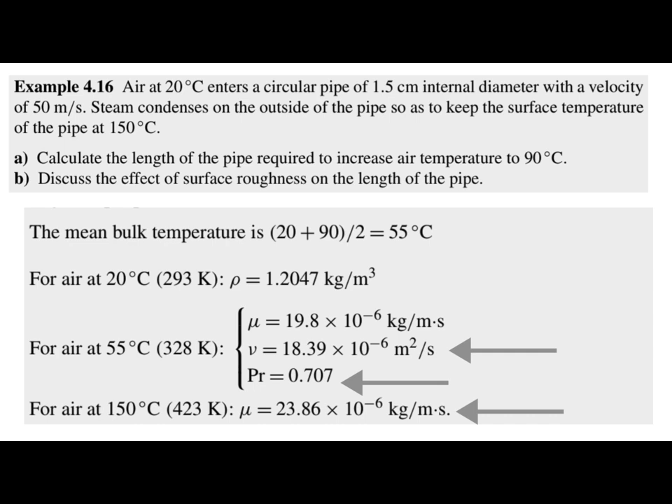This is the different part of the question. Now we are given some data: the mean bulk temperature is 55 degrees Celsius, and air properties like density, viscosity, kinematic viscosity, Prandtl number, and other things are given. Let's start the solution.

This is basically the schematic diagram of the question. The air enters at a temperature of 20 degrees Celsius with a velocity of 50 meters per second.

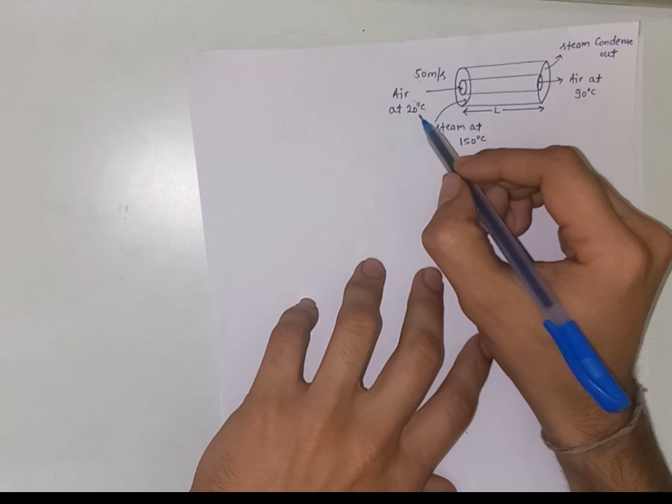Okay, and now we have to find the length of this heat exchanger L, and the air should leave at the end at 90 degrees Celsius. The steam providing the convective heat to raise the air temperature from 20 to 90 degrees Celsius is at 150 degrees Celsius. So steam is entering and getting condensed from that side.

In this question we need to find the length of this heat exchanger so the temperature of air can be increased from 20 to 90 degrees Celsius, from one side to the other. The basic approach is to go by energy balance and mass balance.

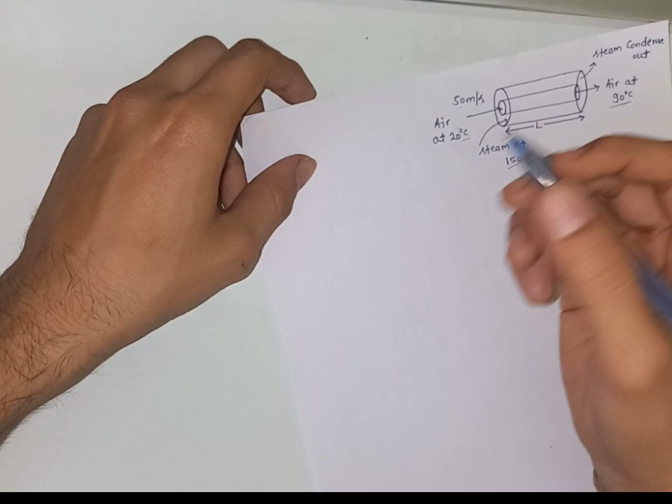Across this heat exchanger, we can write the mass balance: the total mass going inside the system is equal to the total mass going outside the system. Because this is a continuous process, there is no addition of mass, only addition of heat or energy. The steam loses its energy and gives it to the air, condensing out from one side, while the air temperature increases on the other side.

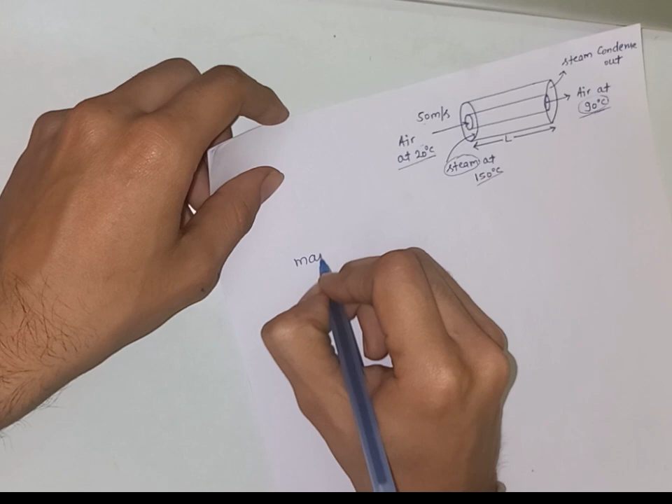So first we are going to write the mass balance. Total mass going inside the system is equal to total mass leaving the system. We are basically talking about the air only, so this is the mass balance on the air - total mass inside the system equals mass going out.

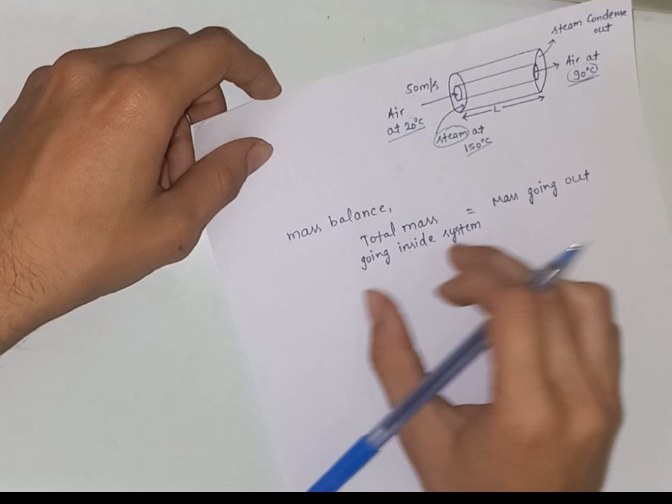These both are equal, and there is no addition or subtraction of mass. Whatever mass comes from one side leaves from the other side, so the magnitude and direction are both the same. This is the mass flow rate, which we denote by m dot, representing kg per second or mole per second.

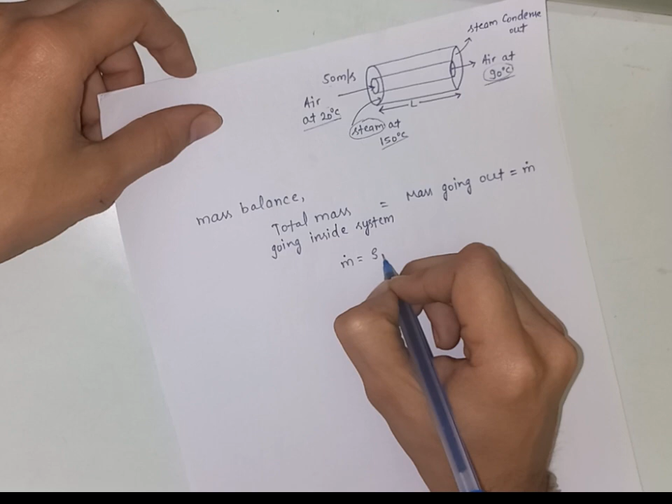This mass flow rate we can also write in terms of density and volumetric flow rate, that is density multiplied by volumetric flow rate q, where density is kg per meter cube and q is meter cube per second. If we don't know the volumetric flow rate, we note this is a circular cross section with diameter or radius, so we can find the area, and we know the velocity. We can write mass flow rate as density multiplied by velocity into cross sectional area.

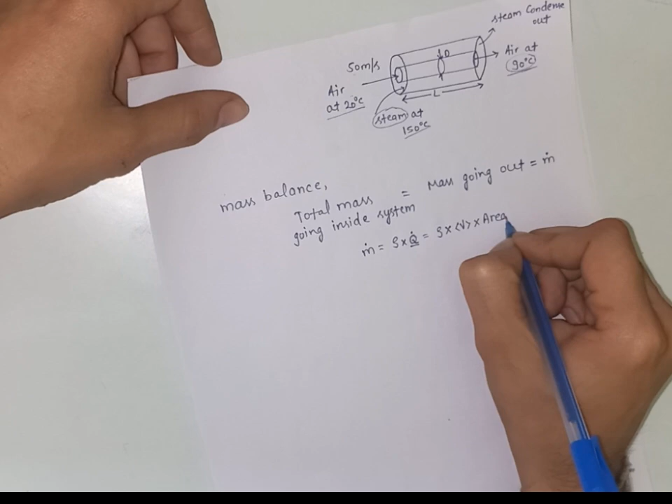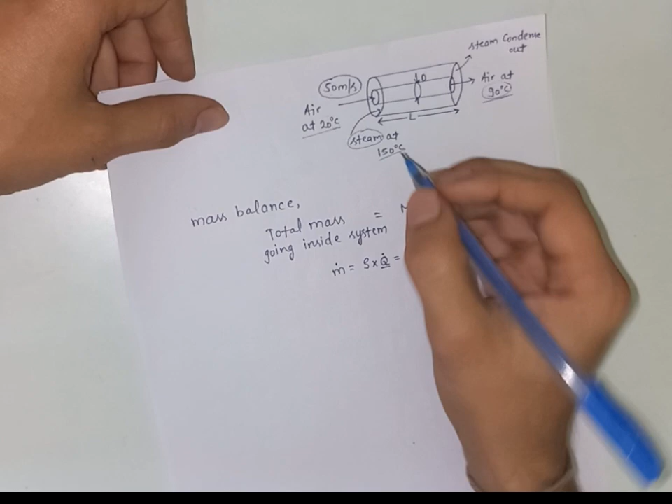This is basically the characteristic velocity - in the case of fluid flowing through a cylinder, this is the velocity through the axis of the cylinder. Here we are given 50 meters per second in the question itself. So we write it as density multiplied by characteristic velocity and area. The area in terms of diameter, since this is a cylindrical case with a circular cross section - area of a circle is pi r squared, but in terms of diameter it is pi d squared by 4.

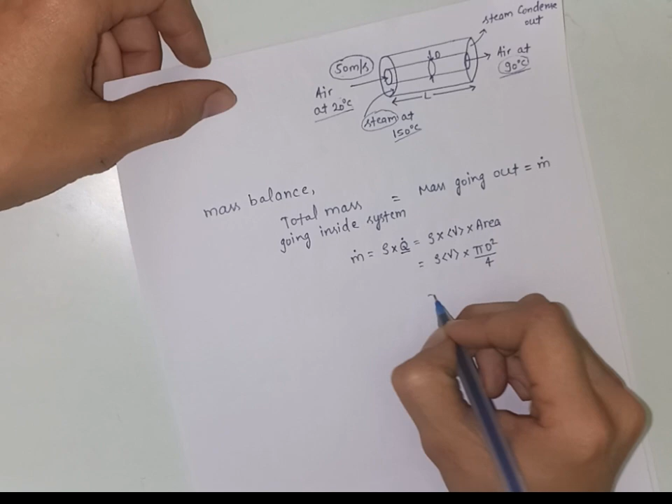So this is the definition of mass balance. Now we are given the data: density at 20 degrees Celsius, velocity of 50 meters per second, and diameter is also given. So now we will find the value of all these constants to find the mass flow rate.

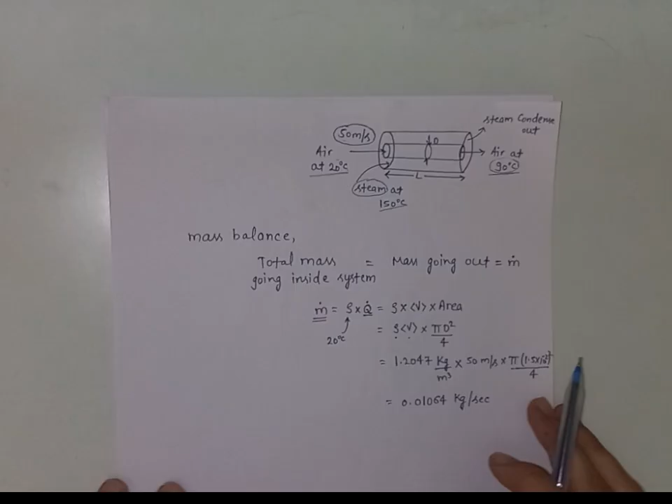So now we have substituted all the values of density, characteristic velocity, and diameter of the pipe, and found the mass flow rate of air inside the system, that is 0.01064 kg per second. This is the mass flow rate going inside and out of the cylinder, which we will use in further calculations. This concludes the mass balance of the air.

Now we will do the energy balance of the air, to find some unknown parameters and correlations to determine the length of that heat exchanger. So now we'll go for the energy balance.

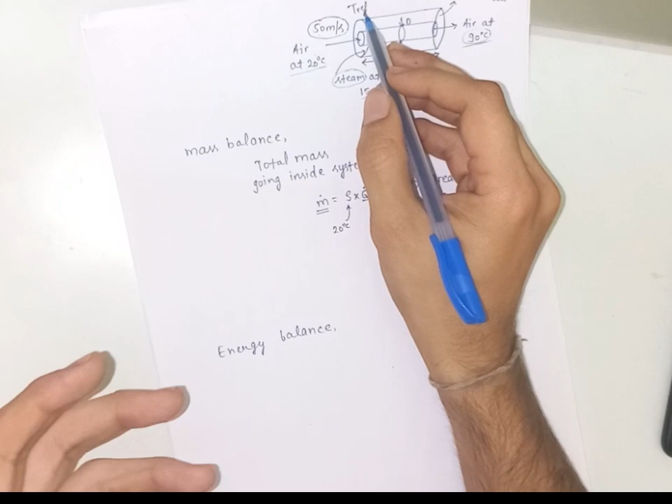So first of all, energy which is going inside the system at the entrance, because air is at 20 degrees Celsius. So we will take a reference temperature for our calculation purpose, to represent the energy contained by the air when it is entering the cylinder. Initially we're going to write the heat capacity or heat at a reference temperature, that is T reference.

So energy in by air, that is Q in, which is equal to mass flow rate in kg per second, into heat capacity of the air, and the temperature of the air, which is 20 degrees Celsius already given, minus this T reference temperature, because we are representing this energy with respect to some reference temperature. So this is a kind of reference temperature for the calculation purpose.

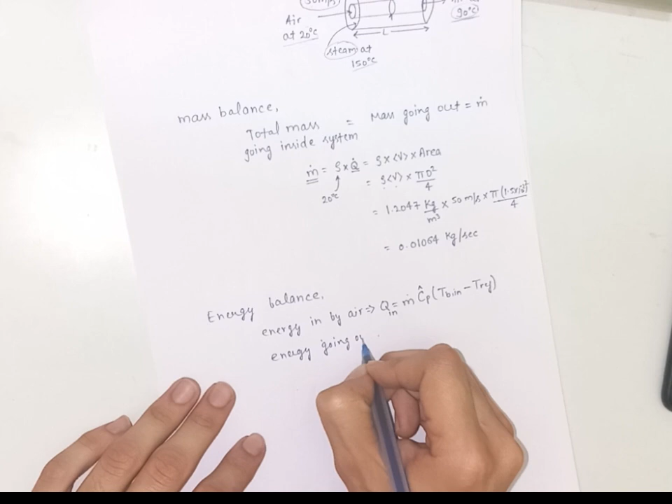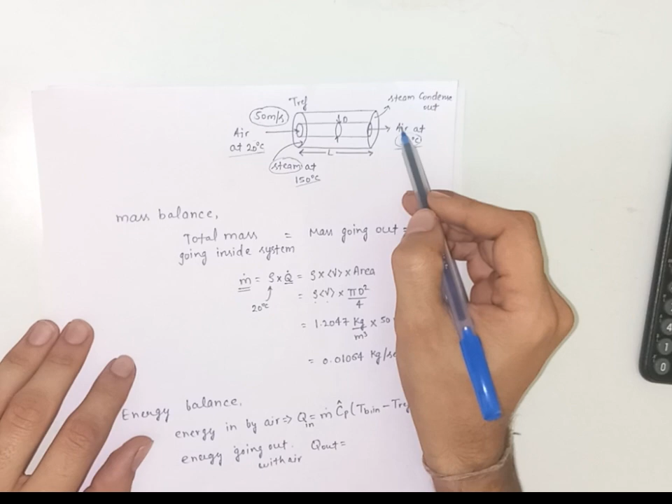Now, energy which is going out, we are going to represent by Q out. The thing we need to keep in mind is that when the air is entering the cylinder, the heat it contains is mCp delta T. But now, because when it is leaving the cylinder, the steam loses its energy and gives it to the air, and the steam condenses, and the overall energy of the air will rise.

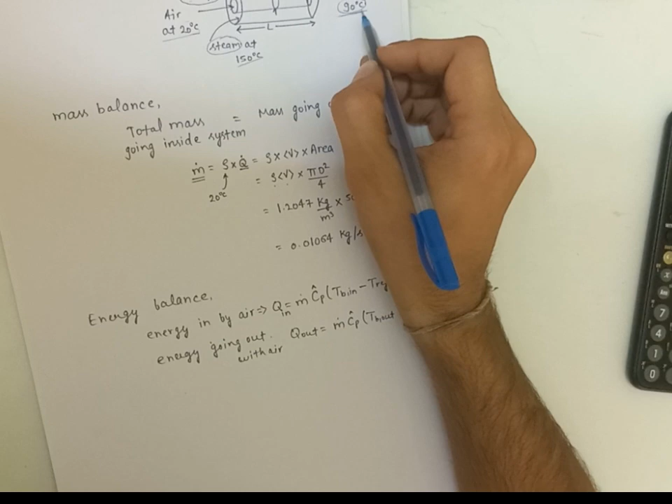So how much energy will rise? We're going to write mass flow rate Cp, that is heat capacity, into the temperature out, that is 90 degrees Celsius, minus again T reference, and now the convective heat transfer by the steam to the air, which will be H into contact area, and again the delta T, that is the change in temperature between the steam and the air. So we will have a convective heat transfer between the steam and the air.

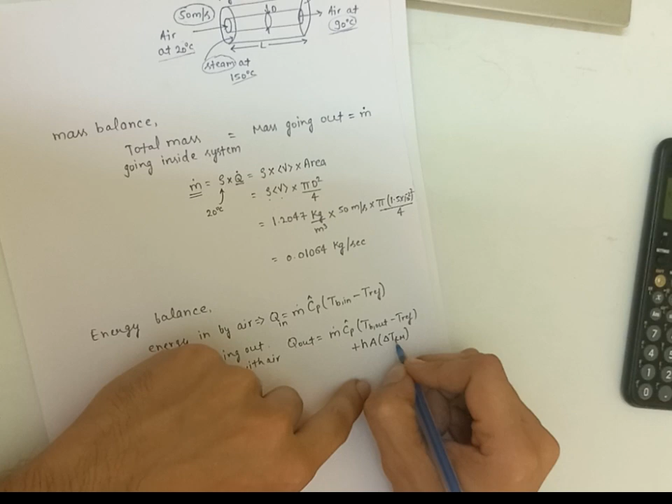So this is logarithmic mean of the temperature. We are having the heat transfer coefficient as average h, and we take the average value of the heat transfer coefficient, and the contact area, in this case a cylinder, so the contact area between the steam and the air is the curved surface area. This curved surface area for a cylinder is 2 pi r h, so the area will be 2 pi r h, and h means length, so L.

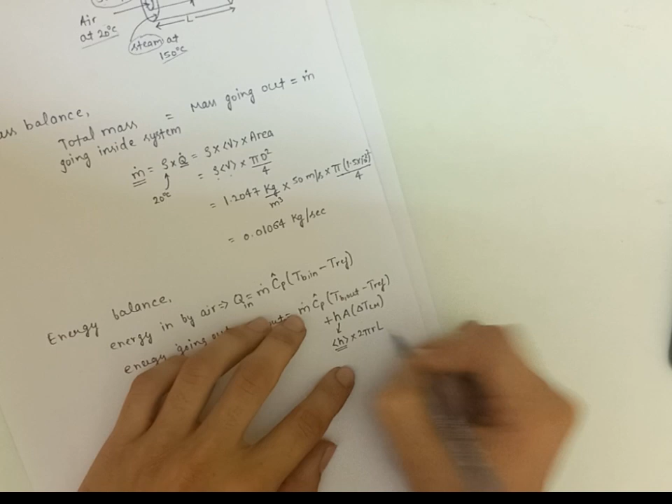And now this delta T Lm we are having, so this can be written in the expanded form, something like that. And now we can also write 2r as d, so this formula can be written as h into pi dl into delta Tlm.

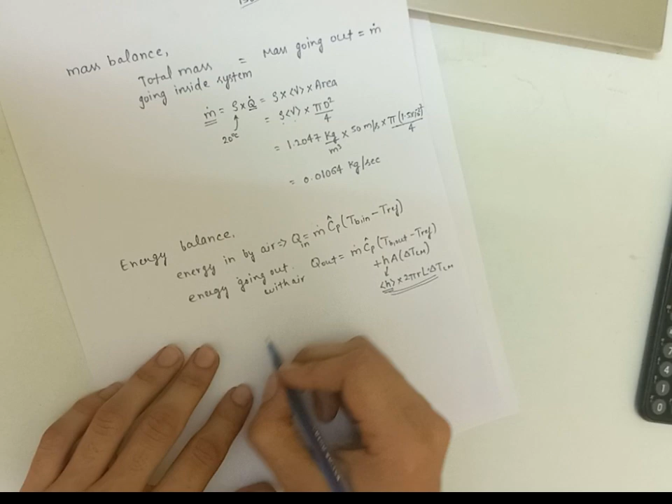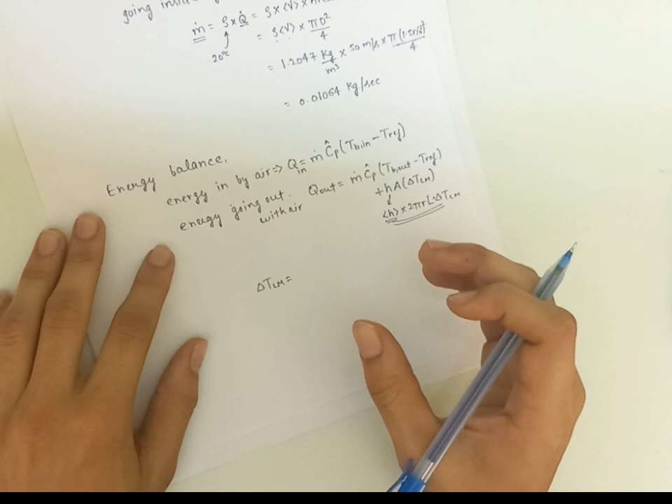Now this delta Tlm is basically the logarithmic mean of change in temperature, because as the steam goes from this side to the other side, there is a mean temperature difference between the air and the steam, since the steam temperature is reducing and the air temperature is rising. So we will not have a definite value between the steam temperature and air temperature, this delta T should not be constant, otherwise it will have some logarithmic mean value, average value. So in cylindrical cases we take the logarithmic mean.

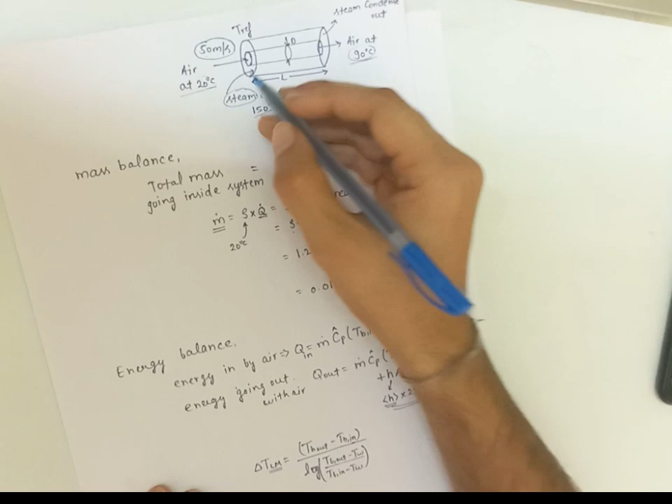So we will write this as TB out minus TB in, already provided in the problem, that is 90 degrees Celsius and 20 degrees Celsius, divided by ln of TB out minus TW, and this TB in minus TW. This TW is another mean temperature between both of these, so we don't need to take care about that, the calculation takes care of it by itself.

So now we will balance both of these, because for the energy balance, energy coming in is equal to energy going out. So for air we are going to balance out both of these terms.

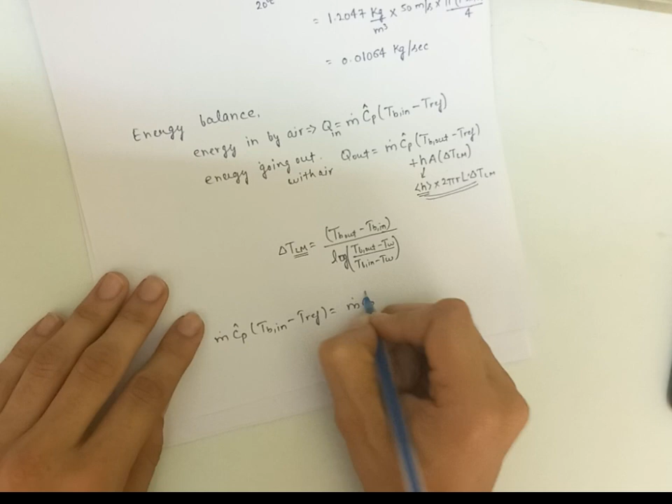So mCp TB in minus reference temperature is equal to mCp TB out plus this convection term, average h into pi d in terms of diameter, and then delta TLM.

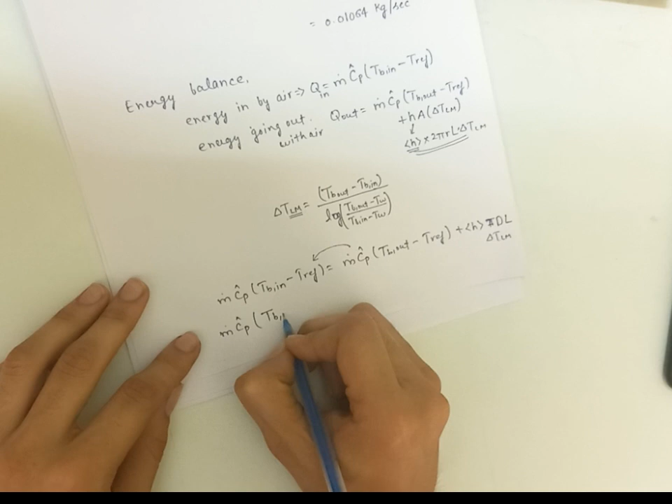Now this term we're going to send it to that side, to reduce the number of terms. So when it comes to this side, we will get a term as mCp, and this will be TB in minus T reference temperature minus TB out minus T reference temperature is equal to average h pi d delta T logarithm.

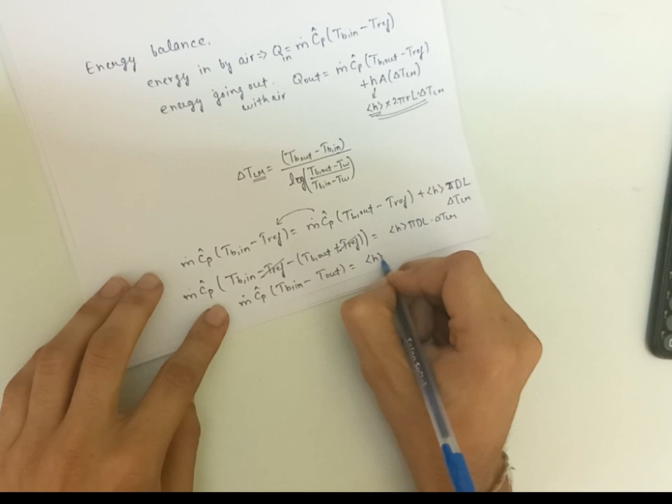Now when we open this bracket, this will be plus, and this both reference temperature will be cancelled out, and what we are left with is mCp delta T plus TB in minus out is equal to average h pi d delta TLM.

So now at the end of energy balance, we get this relation: mass flow rate, heat capacity, and TB out, the output temperature of the air. In this case, it is 90 degrees Celsius, and the input temperature is 20 degrees Celsius, and h, the heat transfer coefficient, and that area, and the logarithmic mean temperature difference of the heat exchanger.

Now we're going to substitute the values here, and we need to proceed with the solution to find out L, that is the length of the heat exchanger.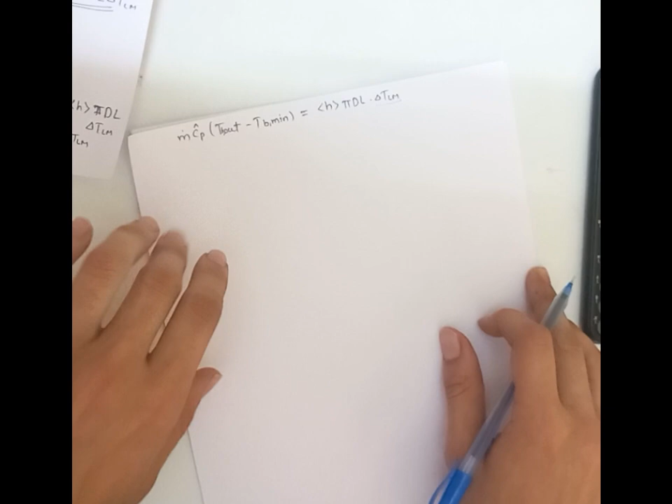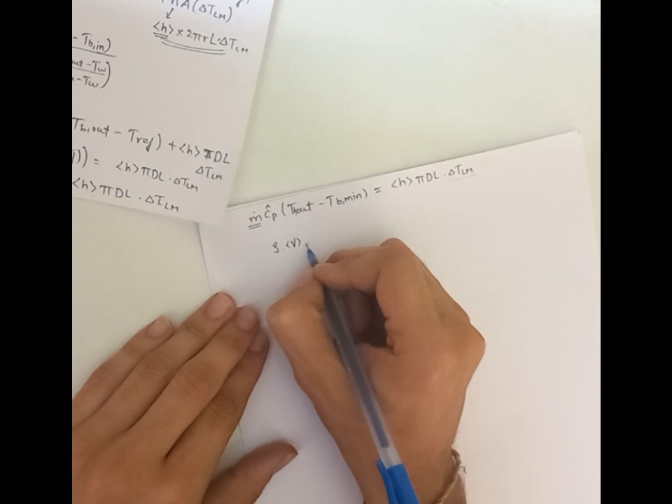Now this M can be replaced by the formula we already have, that is rho and velocity and the area of that cylinder. So M can be written as rho and the characteristic velocity V, and pi d square by 4, and Cp, and we know this is TB out minus TB in.

All the things will remain the same, only we have to substitute mass flow rate M, and this H pi d L and delta TLM. Now we know pi and pi will cancel out, and d square will be cancelled out, so nothing remains here.

Now what we're going to do is take out H, the heat transfer coefficient, and this logarithmic mean to that side, so that we can equate L equal to this whole term, because we need to find out L. So the whole term should be at the right hand side or left hand side, and we need to find out L. So we're going to write it as...

Rho V Cp, this D, 4H, the heat transfer coefficient, and delta TLM, logarithmic mean temperature, and this is TB out minus TB in, is equal to L. So we can write it on that side, that will look better. So L equals rho V Cp D by 4H, and now we're going to expand this term.

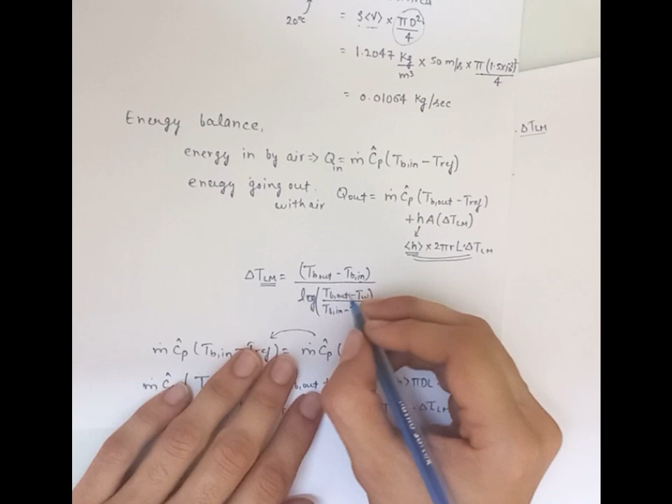We already know this term, and there is one mistake: this is T input and this is T output. The terms will remain the same, and now we're going to put delta TLM, the logarithmic mean temperature difference, here.

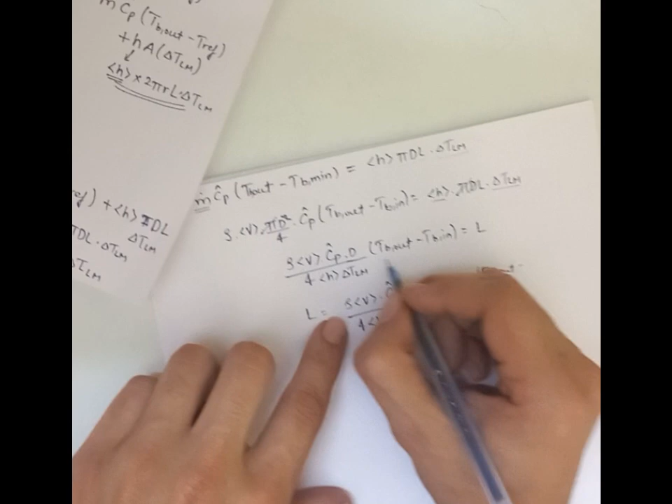So in the bracket we're going to write TB out minus TB in, and the log of TB in minus TW, and TB out minus TW, and here we are having TB out minus TB in. Now we know that in this bracket this term and these terms are the same, so we can cancel them.

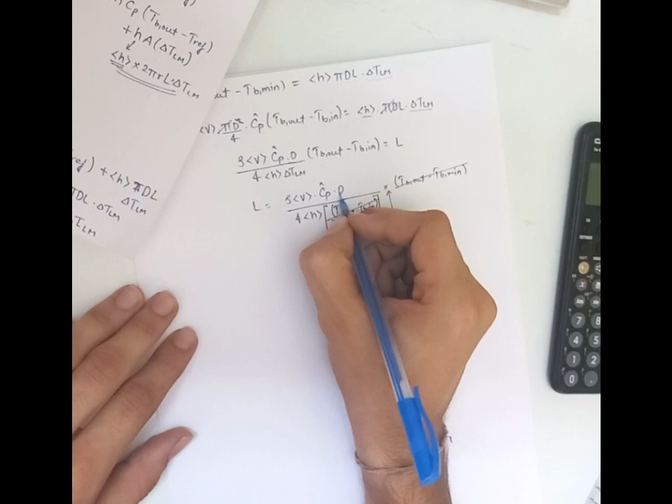And this logarithmic mean will go to the top side, because this is 1 upon log, so the reciprocal of that will go to the upper side. And now we're going to replace D on the left hand side to work out the ratio of L by D, because we know D and we need to find out L.

So we will equate the L by D ratio, which is more commonly used in engineering. So we are going to equate this term: L by D is equal to rho V, and the remaining terms are Cp, 4, heat transfer coefficient, log, and all the terms.

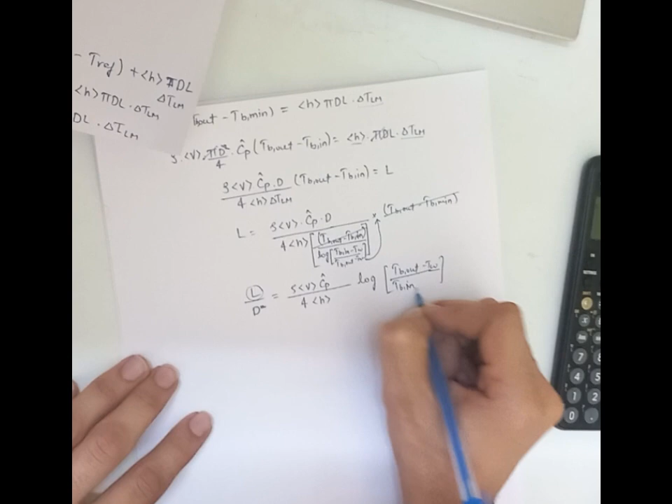Be TB out minus TW, and TB in minus TW. Okay, so now we have finalized the equation. We need to find out L. Main thing is L, we know D, we know most of the terms, and now we need to proceed with the question.

Now we have a relation of L in some parameters like Cp, velocity, density, and the heat transfer coefficient. We're going to proceed further. We can see there is an engineering correlation of heat transfer coefficient like this: heat transfer coefficient, density, characteristic velocity, and heat capacity. This is a reciprocal term, so I have written it in the simple form.

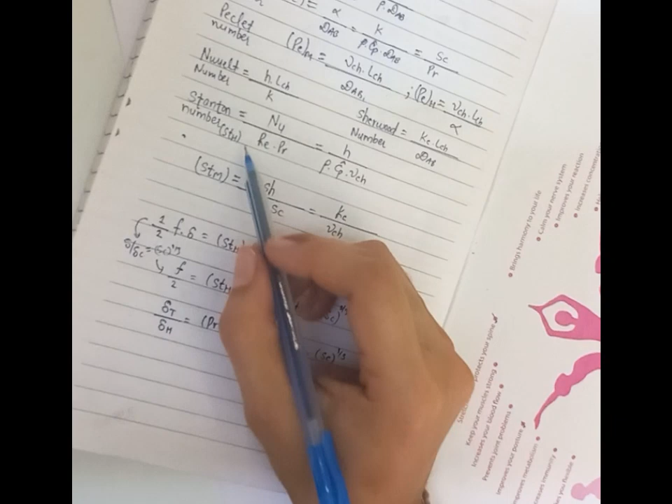So this is equal to the Stanton number of heat transfer, okay so I will show you. This is the Stanton number of heat transfer, that is H upon rho (density), Cp, characteristic velocity. So we have equated these terms here, and this is the relation.

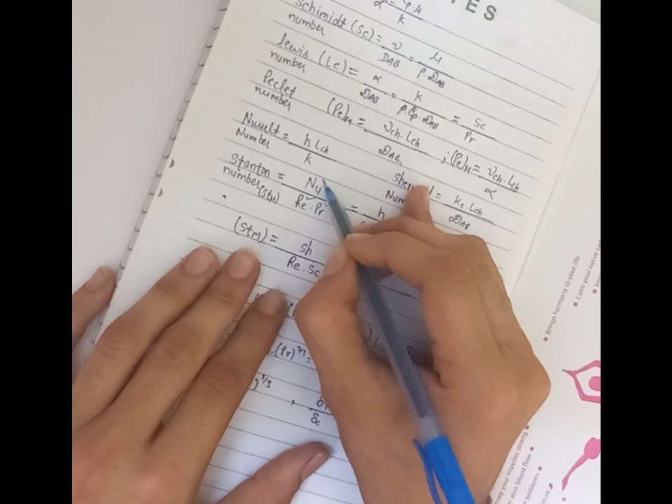And we also know the Stanton number in terms of other important engineering constant numbers, the Reynolds number, Prandtl number, and Nusselt number. We can equate these terms by these numbers, for the simplification. So this term is also equal to the Nusselt number upon Reynolds number and Prandtl number. Because we know this is 1 upon the Stanton number, so we'll be writing here the reciprocal of that term.

So L by D will become, using this relation: L by D becomes 1 by 4, separated out from these terms, and this is Reynolds number into Prandtl number upon Nusselt number, and logarithmic of Tb out minus Tw, Tb in minus Tw.

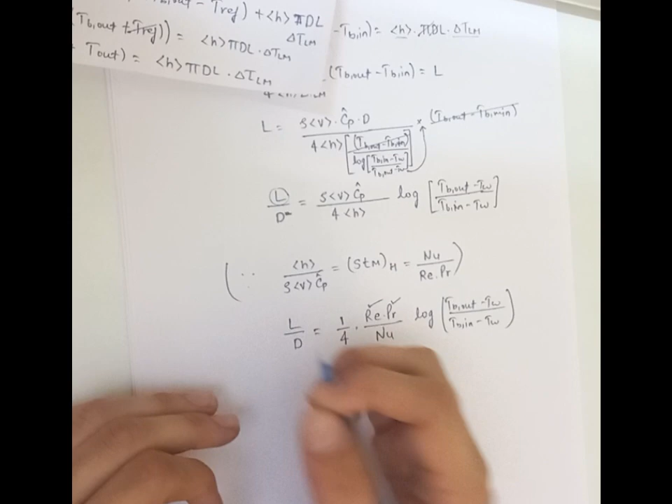Okay, and now we need to find out the Reynolds number. Prandtl number is already given in the question, and the Nusselt number we're going to find out using engineering correlations. We have 3 engineering correlations here.

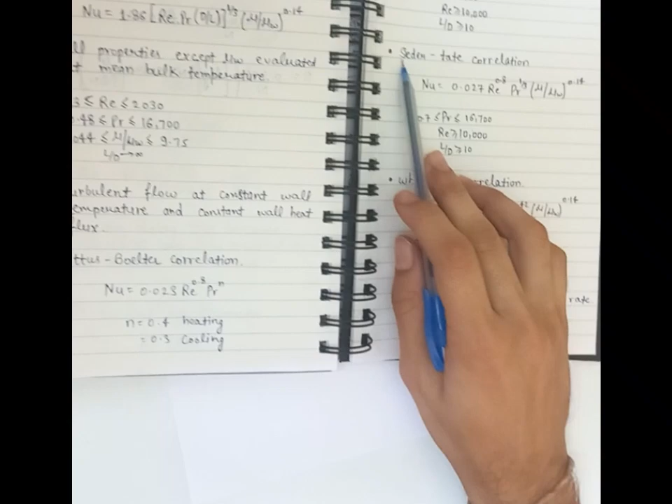For the laminar flow, we will use this engineering correlation for the Nusselt number. For the turbulent flow, we will use the Dittus-Boelter correlation, given by this. Also for turbulent flow, we can use the Sieder-Tate correlation, but the conditions are different here compared to Dittus-Boelter. So according to that, we need to substitute the values and use the formula accordingly. The third one is the Whitaker correlation, with its own conditions. So these are the 3 correlations for turbulent flow and 1 for laminar flow.

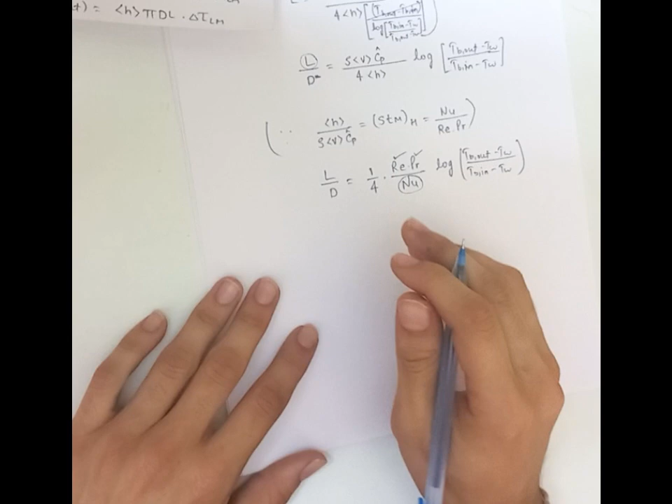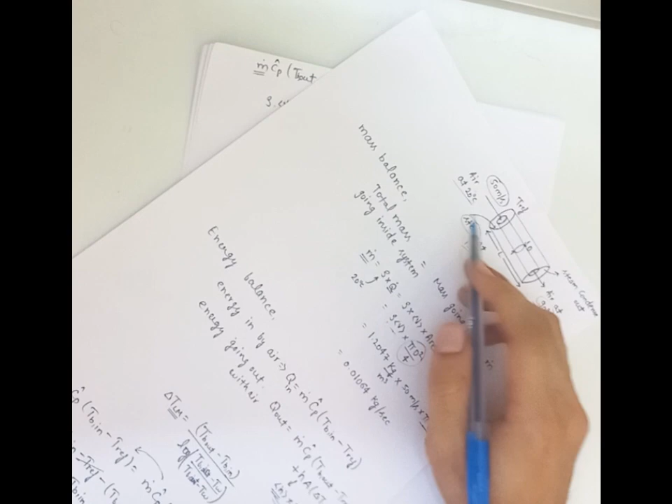So to proceed with these formulas, we need to find the Reynolds number first. Prandtl number is already given in the question. Reynolds number for flow through a pipe uses characteristic length and characteristic velocity, density of the fluid, and viscosity of the fluid. In this case, as I already told, the characteristic length is the diameter of the pipe, and V characteristic is the velocity with which the air is flowing through the cylinder, along with the density and viscosity of the fluid.

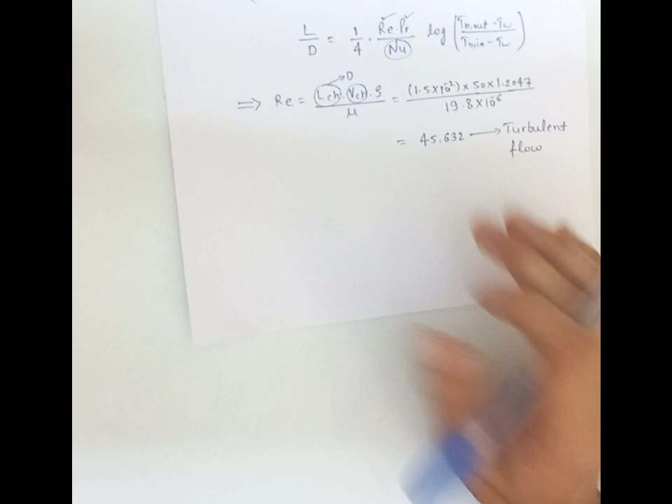Now substituting these values, we will find out the Reynolds number and see whether the flow is turbulent or laminar, and accordingly use the Nusselt number correlation. We substitute all the values like density of the fluid, viscosity of the fluid, diameter as the characteristic length, and the velocity we are having. Now we can see the value is very high, that is 45,000, so this is properly in the turbulent region — the flow is completely turbulent.

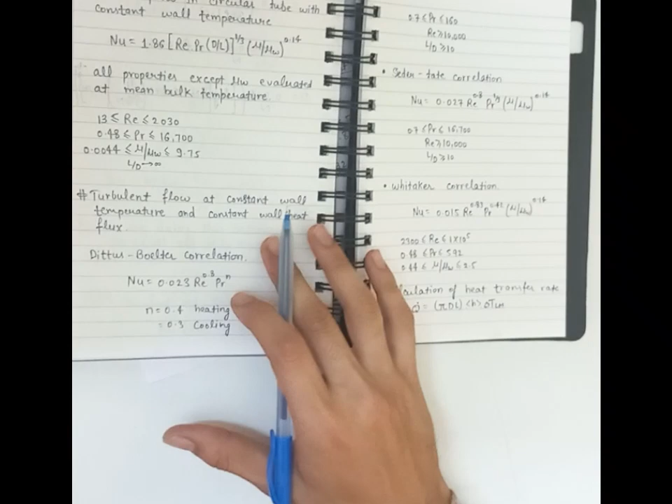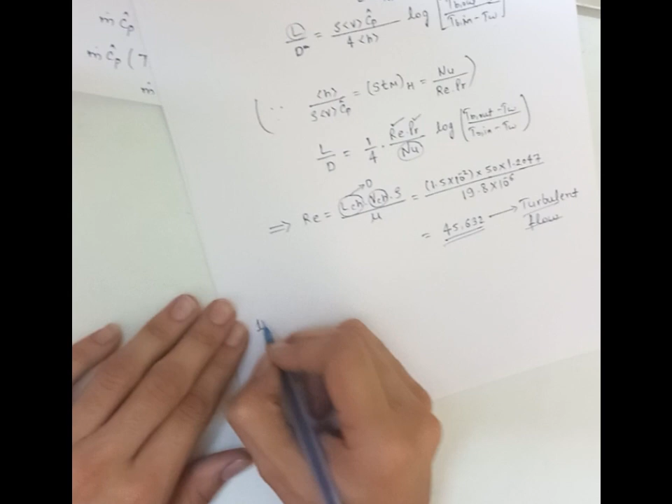So for the turbulent flow, we will use the correlations given, which are 3 correlations: first the Dittus-Boelter correlation, then the Sieder-Tate correlation, and third the Whitaker correlation. We can use any of them according to the conditions given for each, but for this problem we need to compare all the L by D ratios obtained from Dittus-Boelter, Sieder-Tate, and Whitaker correlations. By comparing and analyzing the solutions, we need to make a result. So for this case, we're going to use all three relations, starting with the Dittus-Boelter correlation.

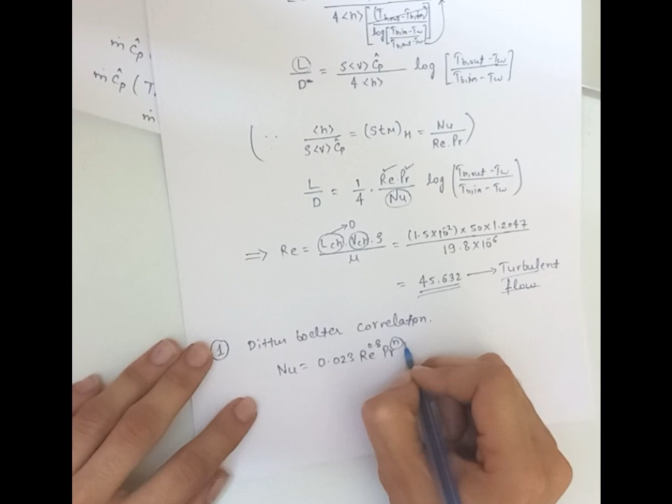For Dittus-Boelter correlation, we have the formula for Nusselt number as some constant value, then Reynolds number to the power 0.8 or 4 by 5, and then Prandtl number to the power n. Now for this n, it will be 0.4 when we are heating, and 0.3 when we are cooling something.

But we know in this case the steam is transferring its energy to the air, so this is properly a case of heating. The steam is giving its heat to the air, so this is a case of heating, not cooling. So we will use n as 0.4 only.

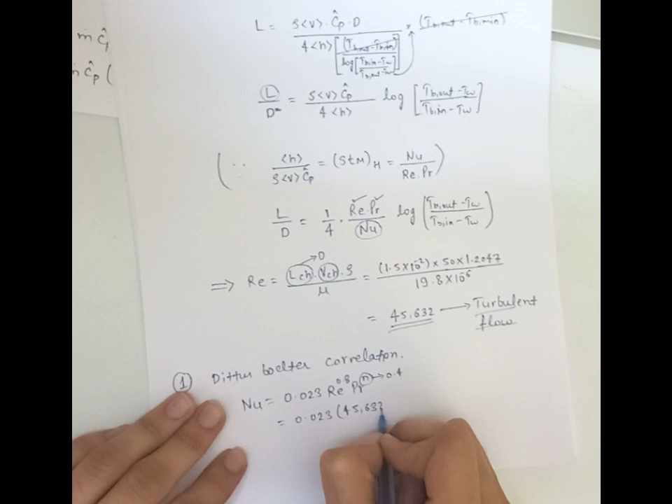So substituting all the values: 0.023, and the Reynolds number is 45,632 to the power 0.8, and the Prandtl number is already given in the question, that is 0.707, to the power 0.4. Now we're going to find out the value of this Nusselt number.

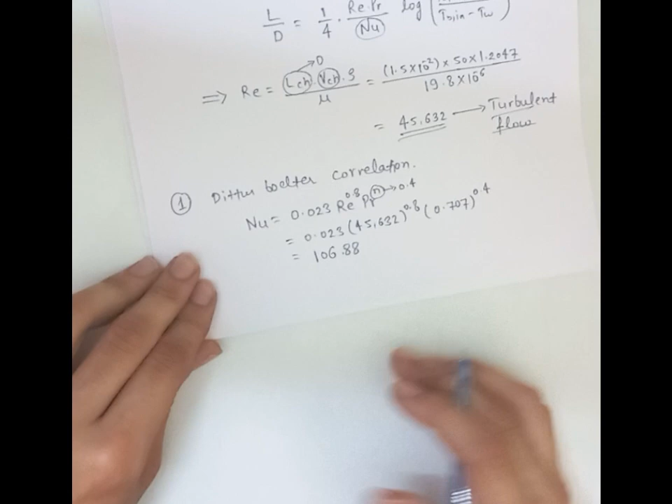So the value which we got for the Dittus-Boelter correlation, the Nusselt number is 106.88. Now same for the other relation, that is the Sieder-Tate correlation.

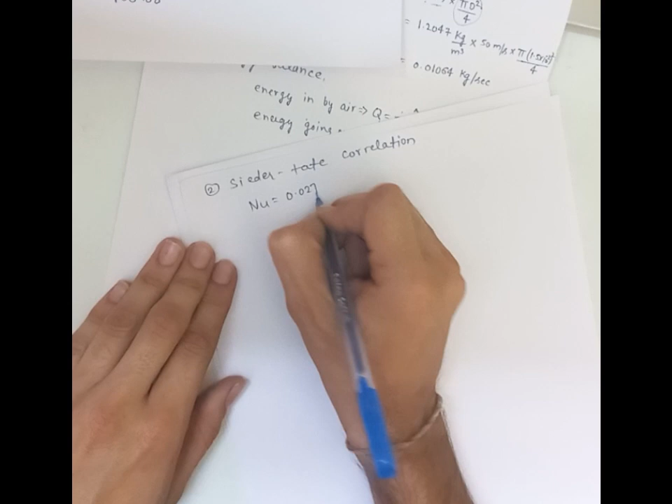And for the Sieder-Tate correlation, we will have the formula: the value of Nusselt number is 0.027, Reynolds number to the power 0.8, and then Prandtl number to the power 1 by 3, and here there's another factor of viscosity to the power 0.14. So before proceeding with the Sieder-Tate correlation, we first need to know that all these properties in the Reynolds number, Prandtl number, and this mu are evaluated at the mean bulk temperature.

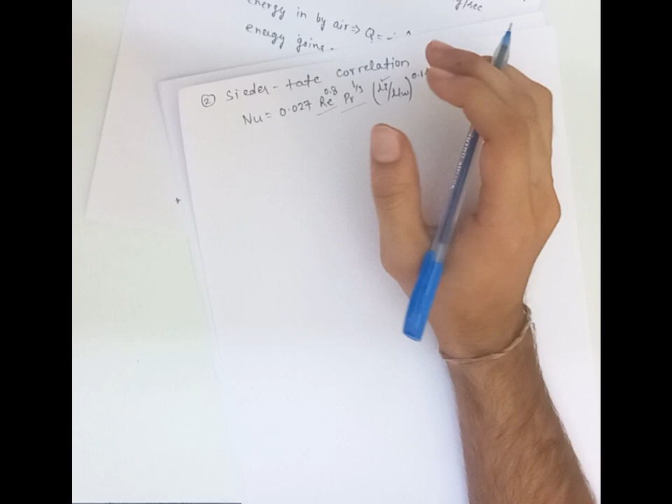In this case, that is 55 degrees Celsius, because we need to take the mean temperature, that is 20 plus 90 by 2, that is 55 degrees Celsius. So all these properties - Prandtl number properties and Reynolds number, all the terms are evaluated at the mean bulk temperature. But this term, the mu W, is not evaluated at mean bulk temperature.

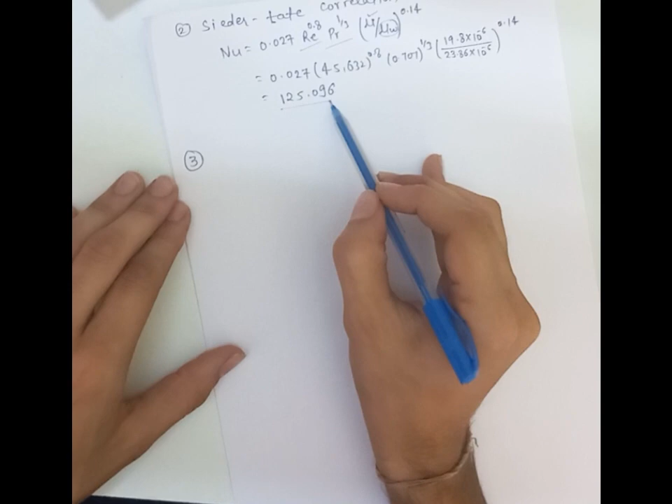Now we're going to substitute the values and find out the answer. Using this relation, we find the value of Nusselt number for the Sieder-Tate correlation, that is 125.096. We have substituted all the values of Reynolds number, Prandtl number, and the viscosity of the fluid and the viscosity at the wall, and we find out the solution.

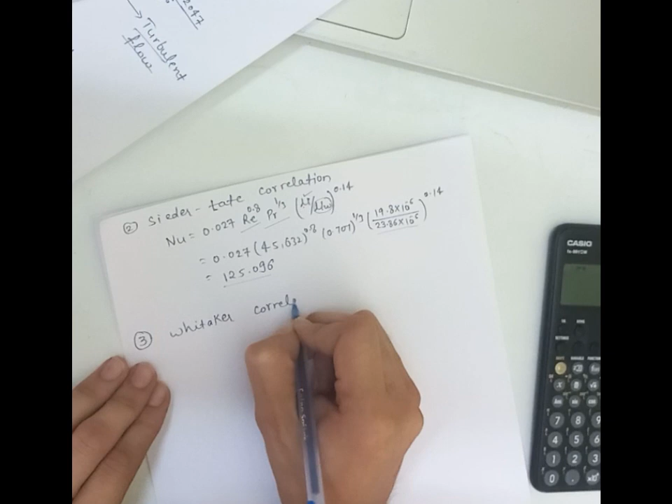Now the third relation, that is the Whitaker correlation. The value of the Nusselt number is 0.015, Reynolds number to the power 0.83, Prandtl number to the power 0.42, and the same factor.

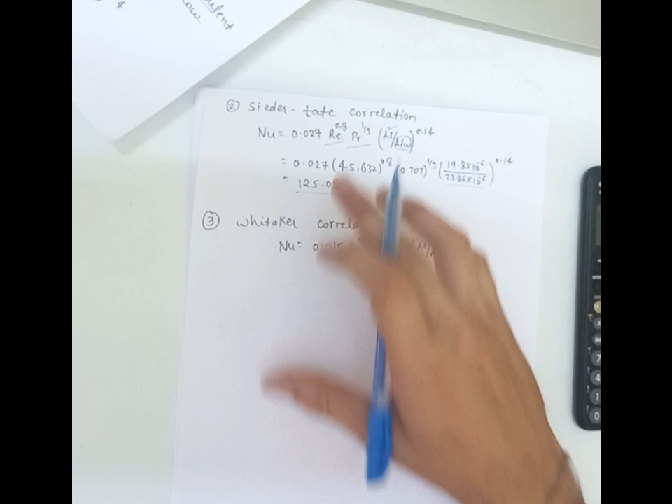So this formula is almost similar to the Sieder-Tate correlation, but just like a normal factor is there for this 0.83 and this 0.42. Otherwise, the formula is almost the same to remember for the Sieder-Tate and Whitaker correlations. Now again, all these properties are evaluated at the mean bulk temperature except this mu w, that is evaluated at steam temperature.

Now we will substitute all the values and find out the answer of the Whitaker correlation. So we have found the value of the Nusselt number for the Whitaker correlation. Now we're going to substitute all these values of Nusselt number in the main formula of L by D ratio.

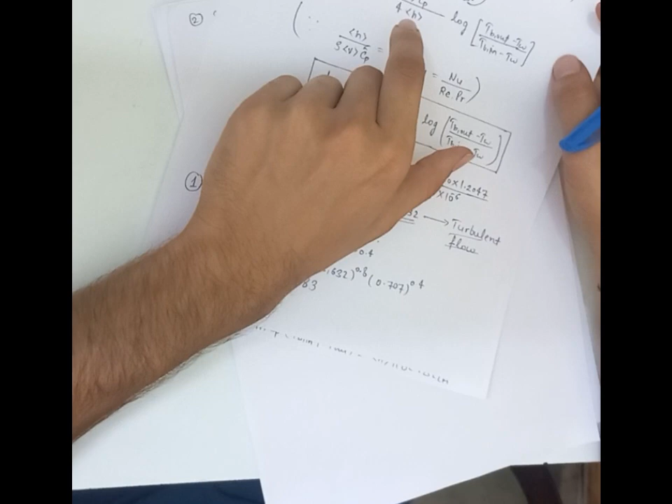So now we are having this Nusselt number, Prandtl number, it is already given in the question. Reynolds number, we have found it here, and the TB out we are having 90 degrees Celsius, TB in 20 degrees Celsius, and this TW is for steam temperature, that is 150 degrees Celsius, already given in the question. So now we're going to substitute all the values, and we are going to find out the value of L by D ratio for all three correlations.

So for the first relation of the Dittus-Boelter correlation, the value of L by D ratio, that is L by D for the Dittus-Boelter correlation.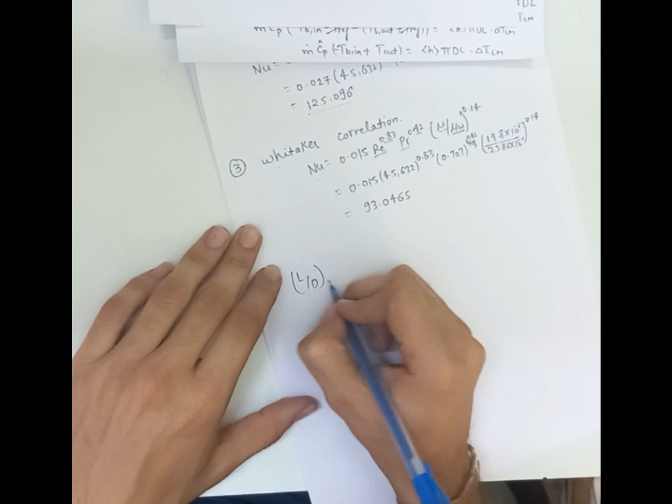So now we have to find out the value of L by D for Dittus-Boelter, for Sieder-Tate, and for Whitaker correlation. The value of L by D for Dittus-Boelter is 25.339, for Sieder-Tate is 21.649, and for Whitaker is 29.107. We have only changed the Nusselt number because the correlation of Nusselt number is different in all three relations.

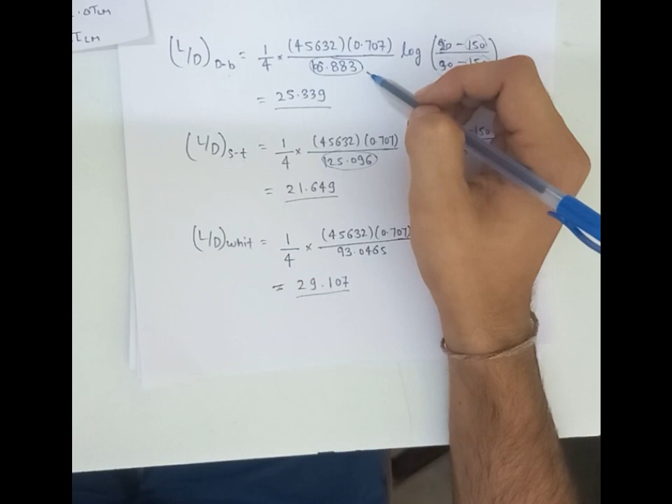Only the Nusselt number is different, all the other things are same. This is the input of the air, this is the steam temperature, 150 degrees Celsius, this is the output temperature of the air, and again the steam temperature. So all the things are same, but only the Nusselt number and its magnitude value is different in all three relations. According to that, we get the L by D ratio for all three relations.

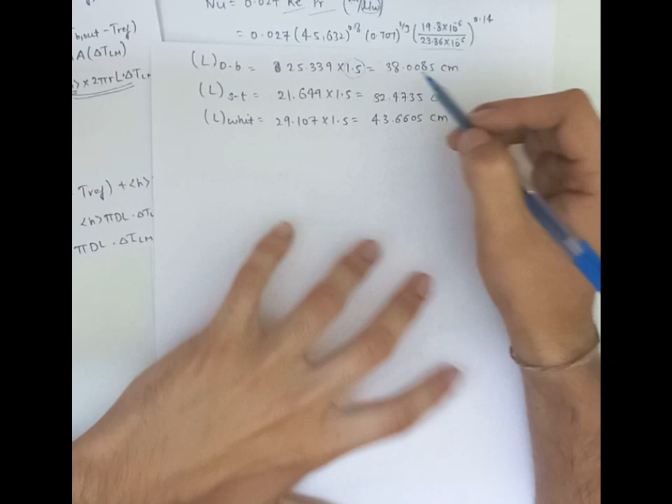Now that we know L by D, we can find out the length by just multiplying D into that number. So for Dittus-Boelter, Sieder-Tate, and Whitaker, all three relations, multiplying by the diameter, that is 1.5 centimeter for this case. So finally we got the length of all three heat exchangers for the three correlations.

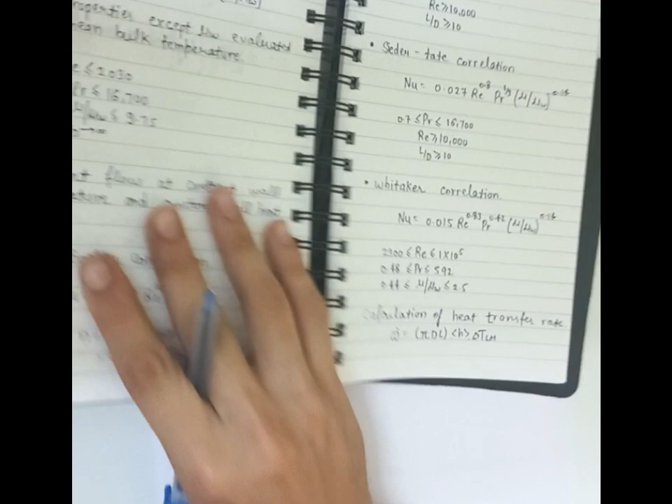For Dittus-Boelter it is the middle value, lowest for Sieder-Tate, and highest for the Whitaker correlation. The reason behind that is in the Whitaker correlation we have some extra factors of 0.83 and 0.42, in comparison to the Sieder-Tate correlation which has 0.8 and 1 by 3 power. So that's the only difference, nothing more than that.

So these are the three values we got from the Sieder-Tate, Dittus-Boelter, and Whitaker correlations. This is the analysis of the length of the heat exchanger.

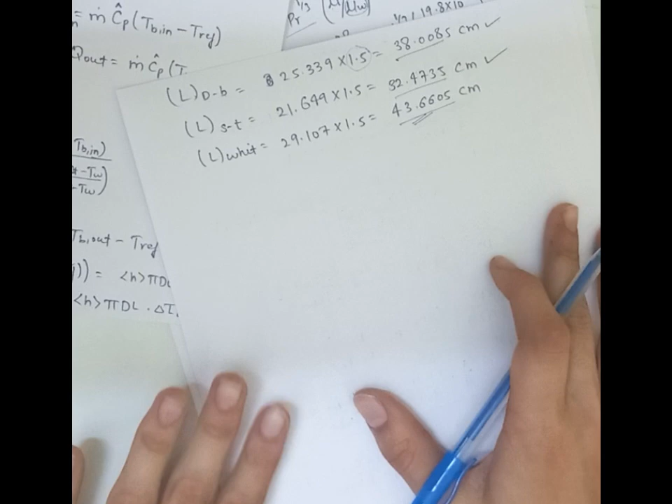Now we have the second part of the question, which says: discuss the effect of surface roughness on the length of the pipe. For that, we need to relate the length of the pipe with the surface roughness.

There should be a relation for the surface roughness, denoted ε, which we use in fluid mechanics.

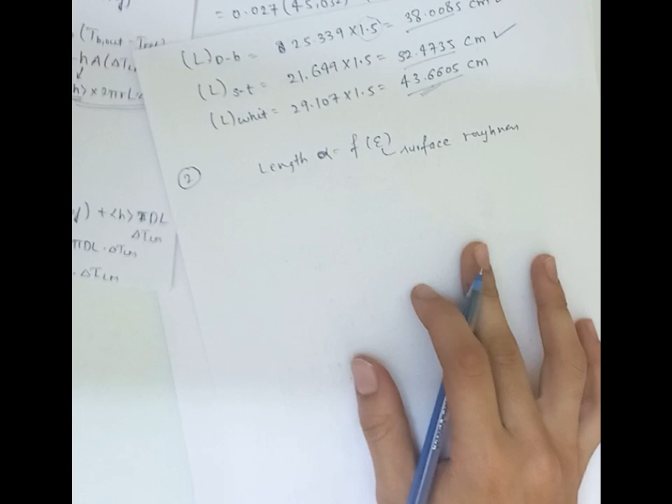So the formula we are going to use here to find out the relation between surface roughness and the length of our system is this.

We have the L by D ratio, that is equal to the engineering correlation we have here. Now we can find out the value of L by D in terms of the surface roughness.

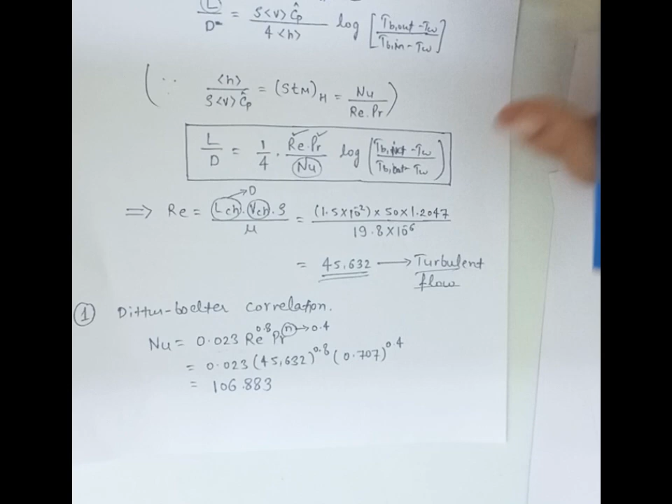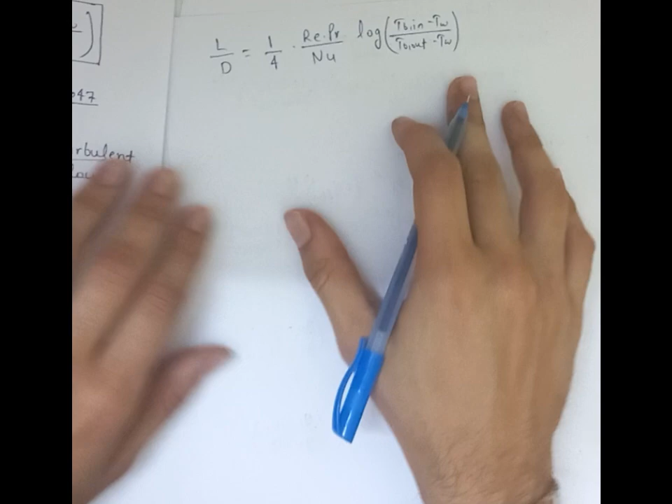So now we'll have our engineering correlations as this, and we can correlate the surface roughness by writing this formula: L by D is equal to 1 by 4 times Reynolds number, Prandtl number, Nusselt number, and then logarithmic of T B in, T B out, minus T W.

This is basically the correlation we have, and as I told you at the start of the problem, this is the Stanton number. So we can write this as the reciprocal of Stanton number, which is the Nusselt number divided by Prandtl number and Reynolds number, 1 upon Stanton number for heat transfer, and this logarithmic term.

Now to find out the relation of friction factor, or moreover the surface roughness, because surface roughness and friction factor are correlated, we need to use the Chilton-Colburn analogy, which says that F by 2 is equal to Stanton number of heat transfer into Prandtl number to the power 2 by 3, which is also equal to Stanton number for mass transfer into Schmidt number to the power 2 by 3.

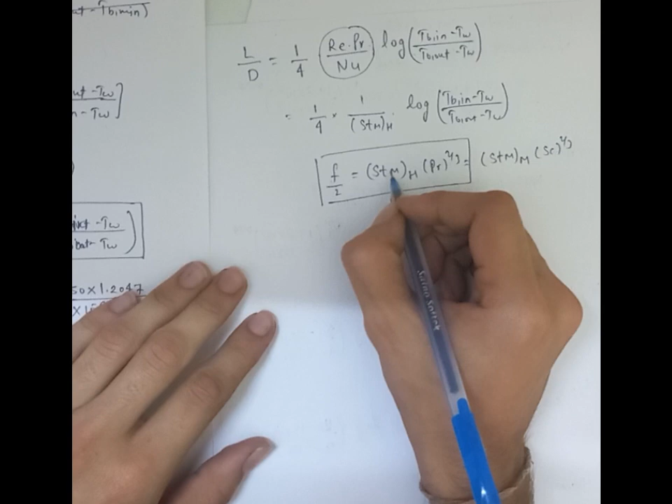Here we are analyzing for the heat transfer correlation, so we will use this part. Now we have this Stanton number for heat transfer, so we will take the Prandtl number to that side, and we can substitute the Stanton number of heat transfer with F by twice the Prandtl number to the power 2 by 3. We are going to use this relation here.

Now by substituting the value, L by D is equal to 1 by 4, and substituting further, we get F into 2 times Prandtl number to the power 2 by 3 and the logarithmic term.

Now we can cancel out the constant terms, and now we have the friction factor correlation with the length of the heat exchanger.

Now we know that the relation of friction factor and surface roughness can be analyzed by: 1 upon root f is equal to minus 4 logarithmic of the relative surface roughness, and some constant is there.

And now the value of this constant, that is A, can be written using the main relation of these three equations. We know the Reynolds number and the diameter of the pipe, and if we know the surface roughness, we can find out the value of this constant A.

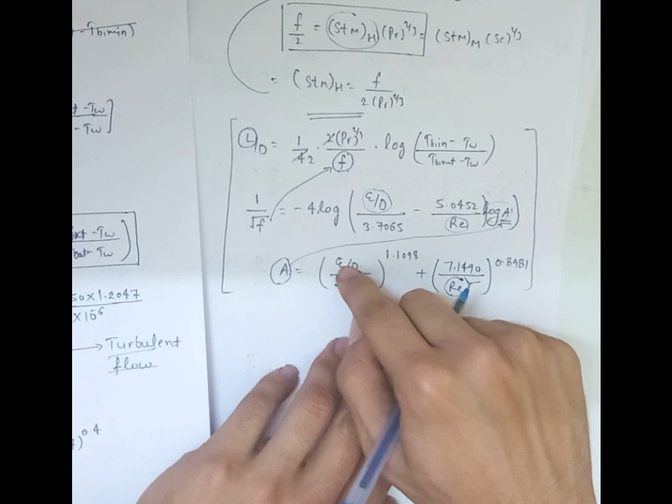So L can be related to surface roughness with this correlation. We will use different values of relative surface roughness, E by D ratio, like 0.0001 or 0.0002 or up to 0.0004 for example, and see how the value of f changes, how the L by D ratio changes, and finally how the value of L changes with the surface roughness, or more precisely, the relative surface roughness.

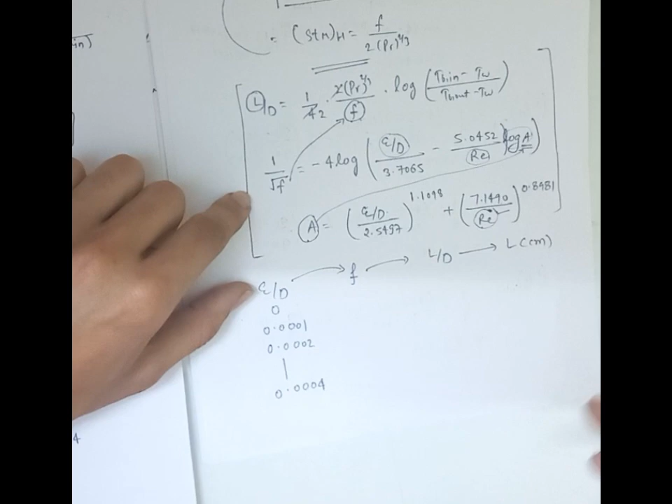By putting in these values, you can find out the friction factor, L by D, and L. Then we can analyze analytically how the relative surface roughness changes and how it impacts the length.

So for different values of E by D, relative surface roughness, we find the friction factor using this formula, and from the friction factor we find the L by D ratio using this formula. We've only changed the value of friction factor - we already know the Prandtl number and the temperature change. So we find the friction factor using the surface roughness, then the L by D ratio, and by simply multiplying the L by D ratio with the diameter, we find the value of length. So here is the analysis.

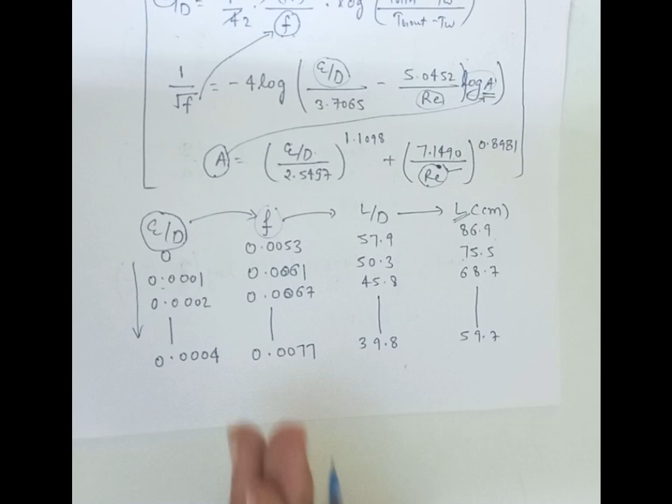When we increase the relative surface roughness from 0 to a higher number, the length of the heat exchanger decreases. It's not a large decrease, but when we increase the relative surface roughness by 0.0001, there is a significant decrease in the length of the heat exchanger. So this is one of the analyses.

This could be explained as follows: when the surface roughness increases, the friction factor also increases, and when the friction factor increases, the power consumption or heat dissipation increases, because of the Stanton number heat transfer correlation with the friction factor. We can expand this as heat transfer coefficient, density, Cp, and characteristic velocity. We can see that the friction factor is directly proportional to the heat transfer coefficient. So with the increase of relative surface roughness, the friction factor increases, and with the increase of friction factor, the heat transfer rate increases because the heat transfer coefficient also increases.

Then we require less contact, or less length or volume for the contact of steam and the fluid, so we require a smaller length of pipe. So here is the analysis of this question.